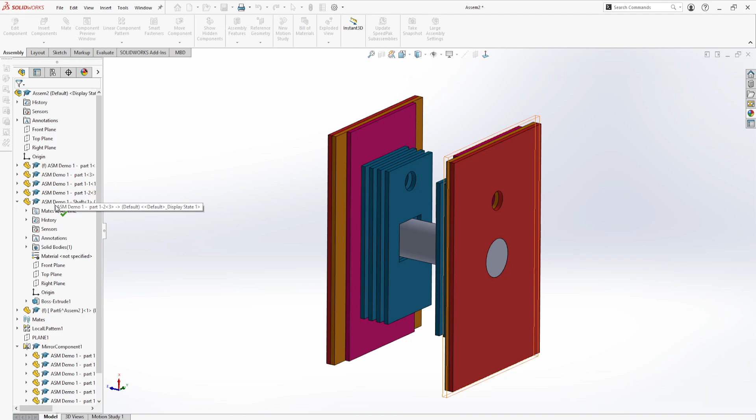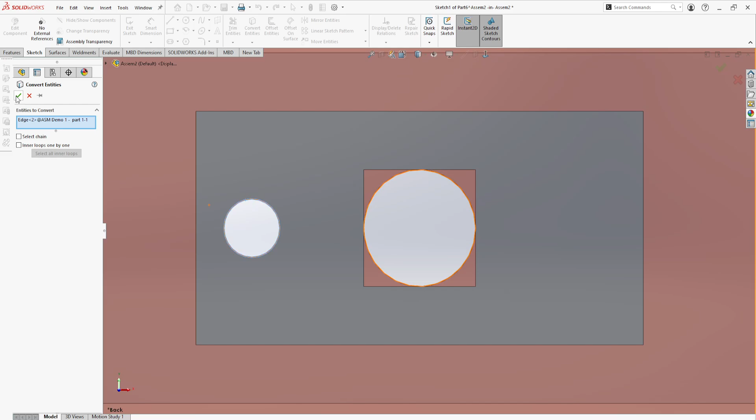In this dropdown, we hit the drop-down arrow and say new part. Now you select a face to start your sketch on, and normal to. Let's go ahead and convert this circle - no, I want this one, so let's get rid of that. We can select this pin and convert it. Now we have that pinhole that we created in the assembly converted in our sketch.

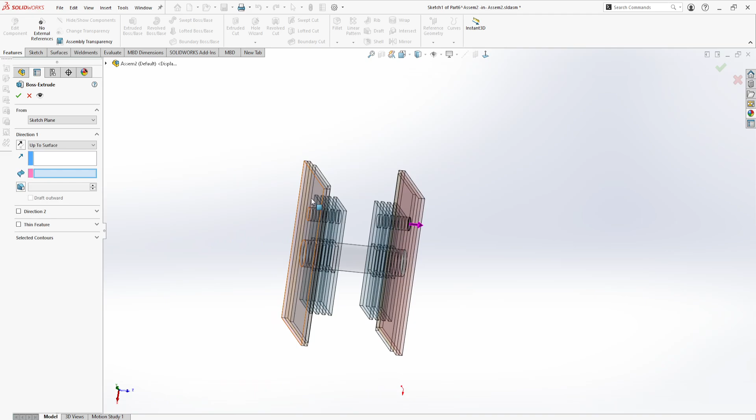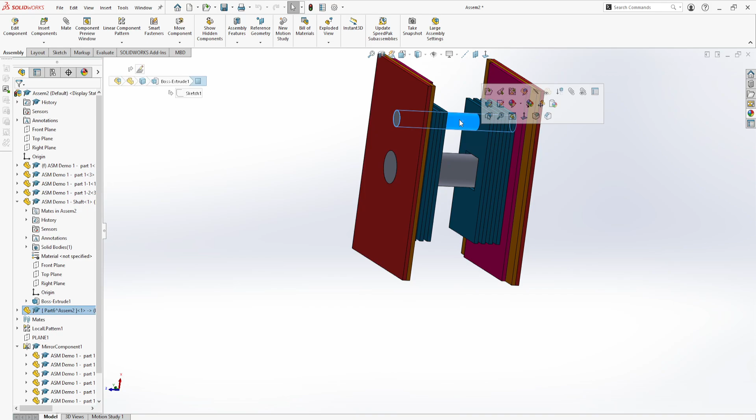Then go to features, extrude base, and say up to a surface. We can then grab our back face on the opposite side of our assembly and hit the check. Then we can leave this editing in context view, which is edit component - click that. Now we can see we have another pin going from this side of the plate to this side.

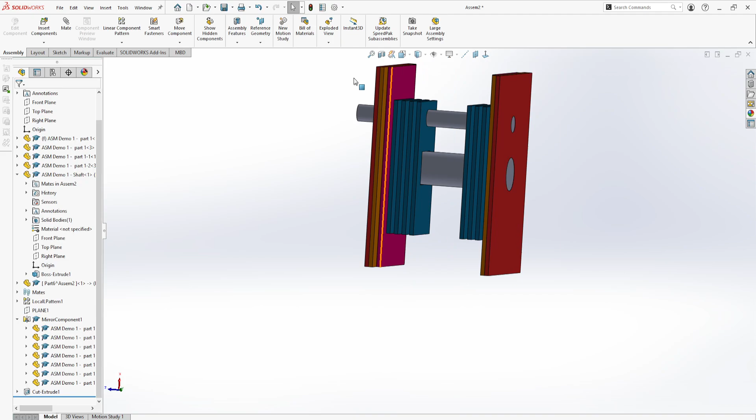So the benefit with that is if this changes - let's say our plane is, instead of being 2 inches offset, let's say it's 2.5 - we hit check, rebuild the assembly, and we can see that this pin still goes through the whole length. This pin, however, since we aligned it to that center plane, but the length is actually described inside of the part itself, we would have to go and update this pin to be the full length.

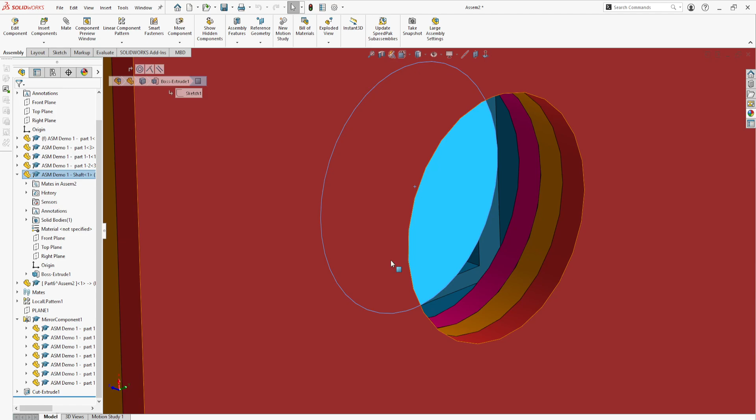Whereas this pin, since it's modeled in context with the assembly, if the assembly size changes, this pin automatically got updated.

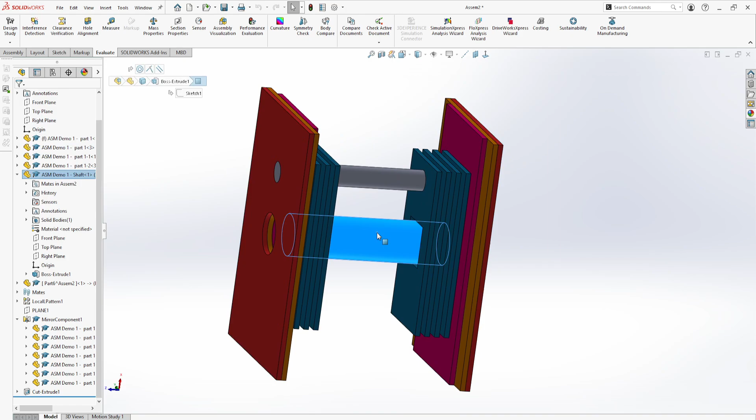This one, we would have to go to evaluate, measure, find our new size at 5 inches. We'd then have to open this part, go to our extrude, set that to 5 inches, go back into our assembly, rebuild, and now we can see it is the full length.

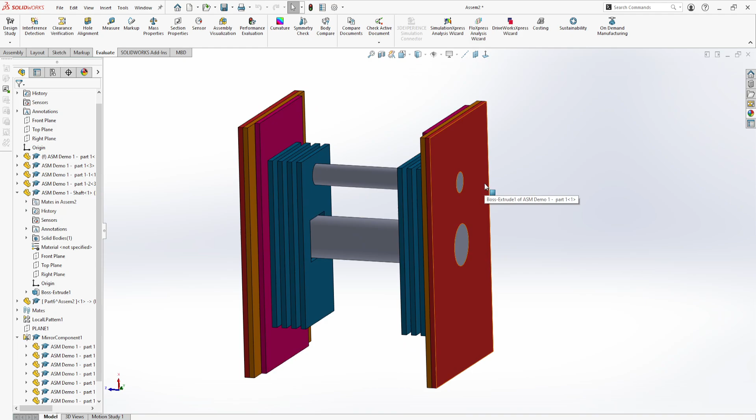Another thing you can do instead of modeling in context is have a formula in your assembly of this size to this size and link back and set the size to that. But there we go - now we have 2 pins in our assembly.